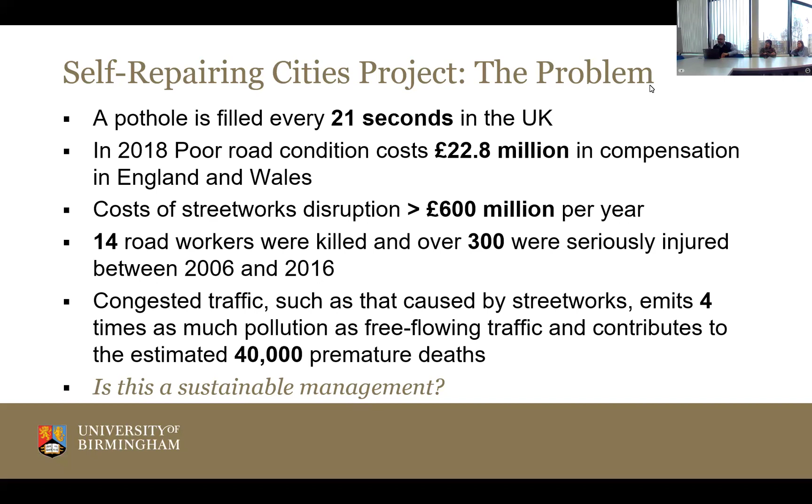As part of our solution, the Self-Repairing Cities project, we were looking into automation using robotics, for detection as well as for repair. It was part of our vision for zero disruption from street works and road works by 2050. You can see the list of partners. The University of Leeds was the PI, Birmingham, the University of Southampton, and UCL in London. Different expertise: a lot of people from computer science and robotics backgrounds, as well as engineers, and also the economic side, the human interactions. It was a large project, around £5 million for 4 years. And I was in the Birmingham team.

This is again an illustration of what we tried to do. On your left, number one, this is our current approach, and it is the same everywhere. Yesterday, Sunday, I went around the city of Zurich, around the old town. I could see the nasty trenches. They were not working, the work was just abandoned for the weekend. But open cuts, a lot of small diggers, and it is a very tourist-attraction sort of area.

Obviously, the city wouldn't like to see these people working in there, close to the public, and the risk that poses to the public, etc. You can have congestion. You can disturb the traffic, and we know that sitting in traffic produces more CO2 emissions and other emissions.

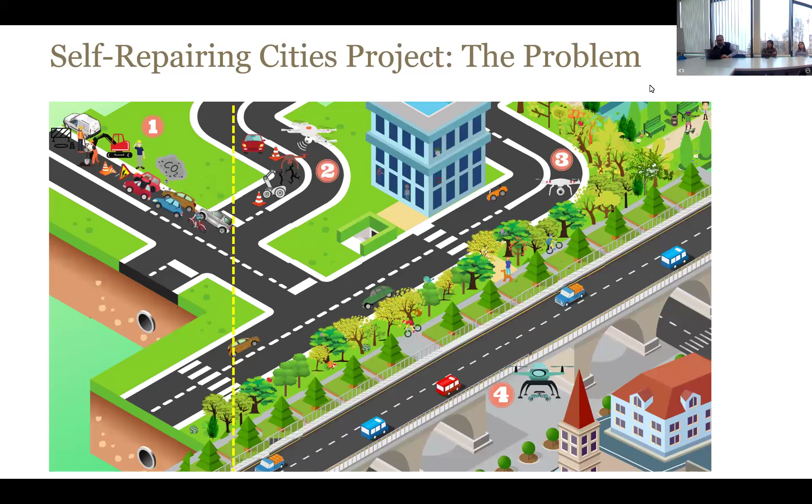What I was involved in was more looking into this proactive approach. So you have a pothole, but what is the mechanism behind it? What happens that ends up in a pothole? This was part of my job, and also working with other teams. UCL in particular, they were material people, so they were into 3D printing.

And then the robotic team, identifying, detecting a crack, to go and measure the volume of the crack with laser scanners and from the images they can take from the drone or robotic platform, and then to do this 3D printing autonomously. So that was a mini project as part of that bigger one, and you can see the steps. Drones were selected to give that flexibility.

So if you go for a proactive approach in 2050, when you don't have human beings, the idea was that you have these hubs in different zones, let's say areas, of the city, and then it can deploy autonomously or with a semi-automated system. They can deploy these drones and they can quickly go during the night.

In the UK, you cannot work, for example, during night time because of the noise to the public. Well, that is the ideal time because traffic is minimum. So if you are doing anything on the road, you are not disturbing the traffic, or it's minimized disturbance. But if we can do it with drones, deploy them, and they can quickly fix a crack, then you can prevent pothole formation. So that was our idea, and therefore using this drone approach.

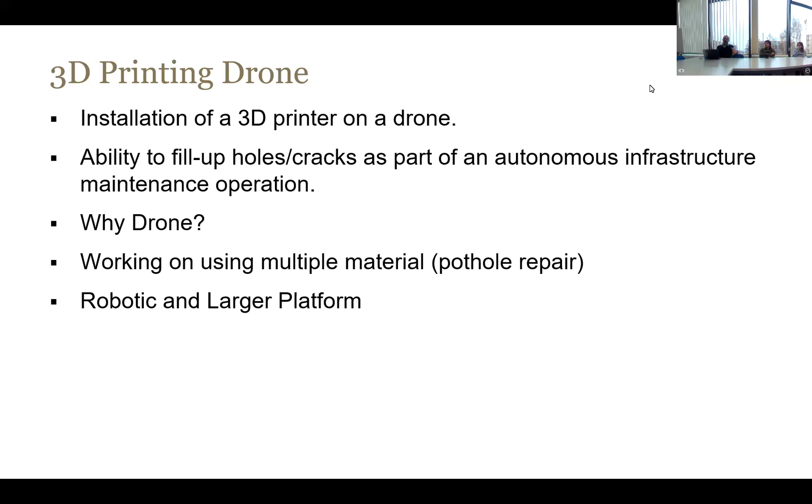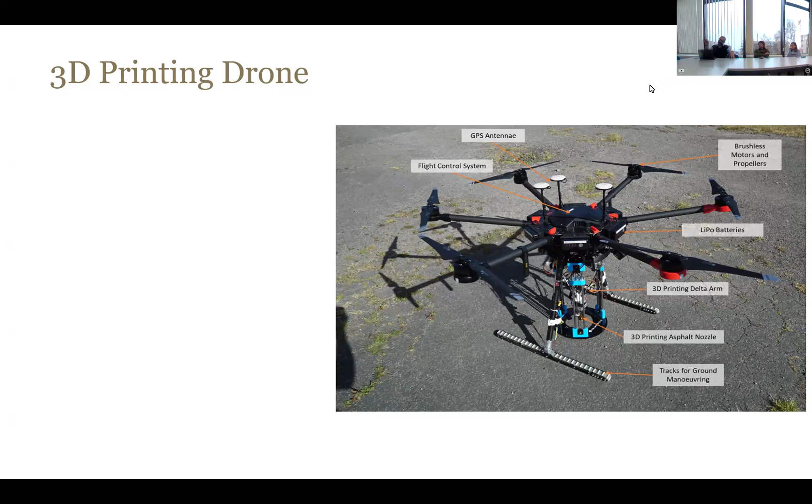And it was equipped with different cameras to detect, so to be used as a survey tool to survey the whole area and identify cracks, etc. And then once on the ground, to start following the crack, if you like, and treat it immediately.

But then for the 3D printing, the higher temperature would make it more workable, so you would ensure that it would go through the cracks. So part of our research was finding the right balance, if you like. So having the right workability, if you like, of the bitumen, while not sacrificing that much on the durability of the material and the 3D printed finish.

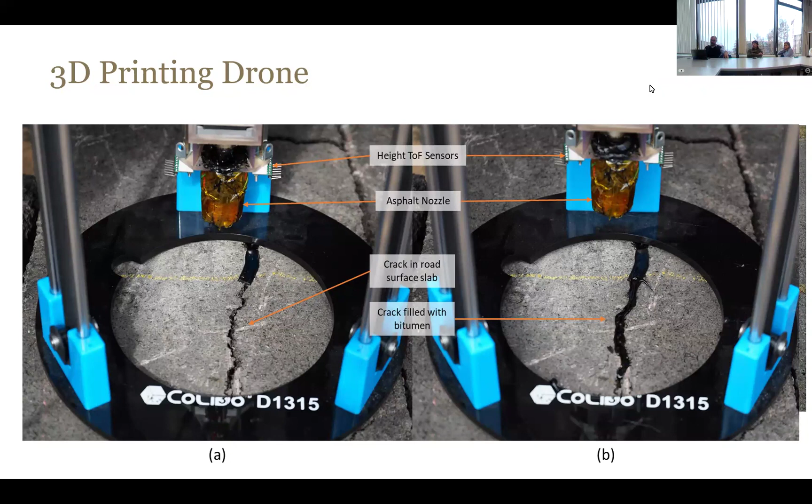I can see a lot of crack sealing around the campus and in Zurich, but it's not the same in the UK. So road authorities, councils, they pretty much abandoned this crack sealing because of the hazard to the road users. So they wouldn't stay. Normally, with the sealing, there would be a hazard to the road users, smashing people's windows, etc. But yeah, it was part of our research.

But roads are built on ground. Within that ground and under the road structure or within the road structure, you've got buried utilities. Normally, the owner of these buried utilities is another organization. It's not a city council. It's water industry, for example, or water companies. There are some assets that there might be, but there might be other assets that they are not. They have different owners, and these owners, they are not necessarily talking to each other.

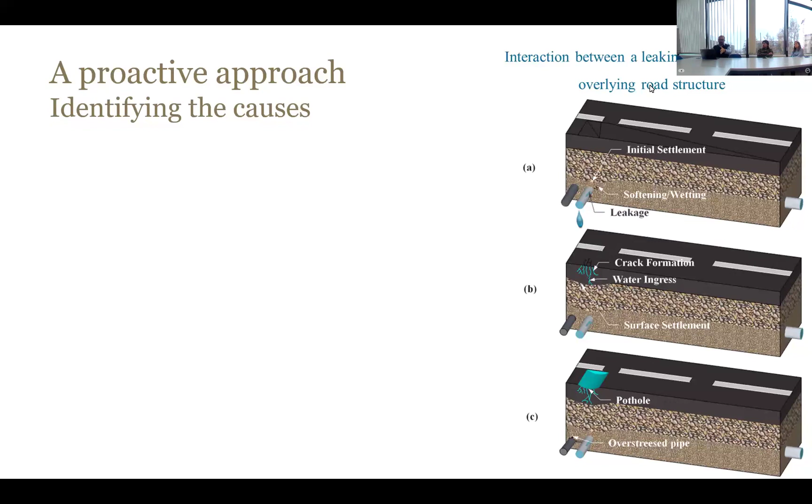We followed the standard UK guidelines. So just the guidelines we followed, but the guidelines would give you a bit of flexibility. All right. So one was with the highest standard, highest end of material, compaction, etc. And the one closer to us, we tried to go with the way that the industry is operating at the moment. So the standard would suggest, just a suggestion, that they compact it every, I think, 100 millimeters, or every layer of material. But industry, they wouldn't have time for that.

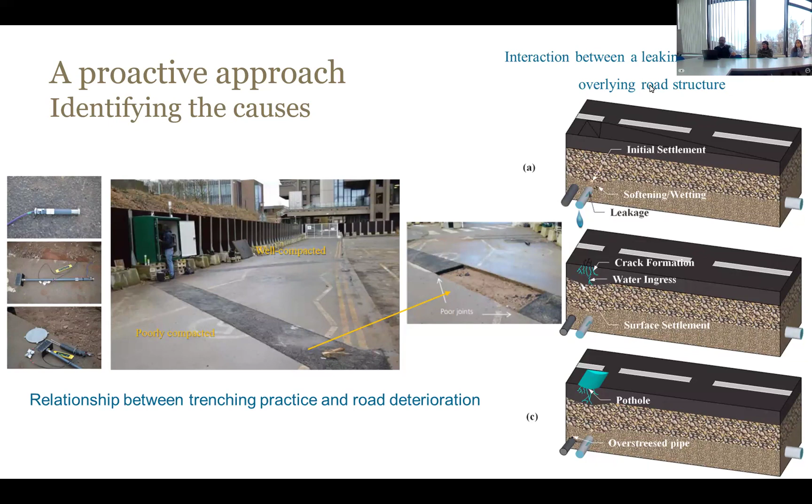So we tried to have this joint in the middle. We left it for the night, and that night there was snowfall in Birmingham. So then water as well as changes in temperature. And we had both trenches instrumented with different instruments. We had a pipe buried inside as well. And this is a year after installation.

So the one on your right bottom, you can see red spots. That's the trench which I just described, the one with a joint in the middle, with minimum compaction and minimum compaction energy. I can recall the displacement of 70 millimeters in one point of that. Just to demonstrate that our trenching activities, our street works, as they are called, have an impact on our road networks. And by not considering this interaction, we are not managing our asset properly or in a sustainable way.

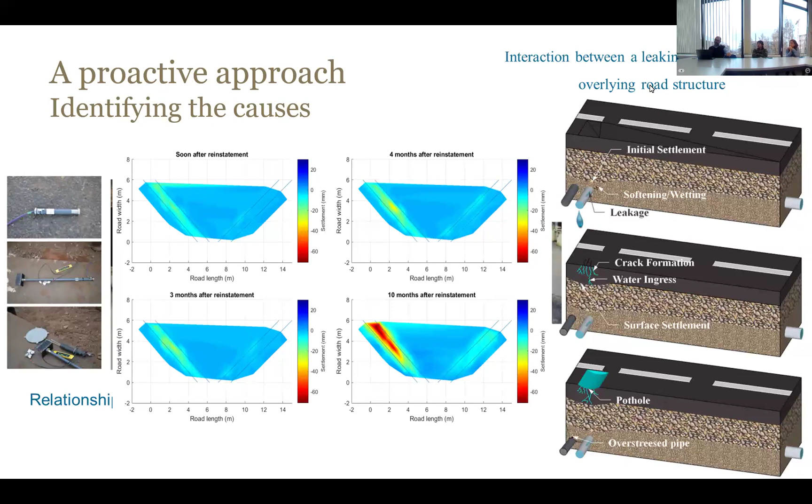So that's it with my previous slide. And this is what I'm doing at the moment. It's a list of my ongoing PhD studies, as well as the ones recently finished. So left-hand side, top, a digitalization of inventory. So the project that I described, self-repairing city, automation, robotics, how to do our inventory. The way we are doing it now, we have a lot of digitalization everywhere, in the UK as well as here and other countries. But this is just collecting data. It's not necessarily the way that we manage this data, we use this data.

So a lot of work by my PhD students around that, managing data, how to use data. Part of it is, as you can see on the bottom of that box, condition prediction. So using this data for prediction models, especially on road application, and using a probabilistic approach, and I'll show you an example later on. So application, road safety, improve road safety, improve the life of the asset. Part of that is to inform decision-making around selecting the best treatment strategies, what to use, when to intervene, how to intervene. If you have that in place, I would say that it is more viable.

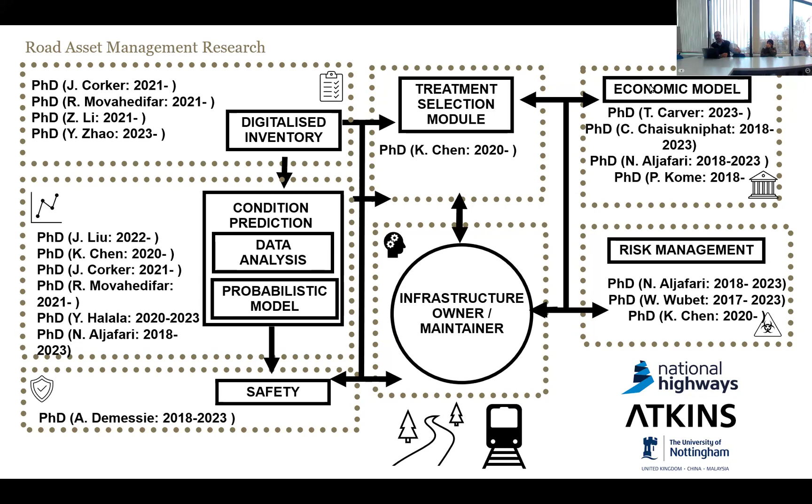Now, so this is informing asset owners. I work closely with asset owners, and I try to have something for them, to inform them, and to tell them how we think we can improve the whole industry. And that will be the impact of the work.

It's just a list of people and organizations that I'm involved in working with at the moment. And some of them from different ends, so from academia, consultants, as well as funders like the World Bank, for example. It's not only UK, it's not only developed countries. I have worked with developing countries, and I'll give you some examples on that end.

This is one of my PhD students. Chen is towards the end of his PhD journey. This is the framework that he developed. It is on digitalization of road network using, on the left you can see, historical data and real-time data. He started with historical data, a database a lot of people have used and are using from the US because it's open to public. It's called LTPP, long-term pavement performance. It's good that it's available.

We started from that database, and it was a numerical model combined with a data-driven, so machine learning, approach to predict, for now, 2 different road defects: something called International Roughness Index, or IRI for short. It's unevenness of the road surface. In the UK, we don't use it. We have longitudinal profile, a different name, pretty much the same thing. It's only unevenness. And rutting is a permanent deformation on the wheel path.

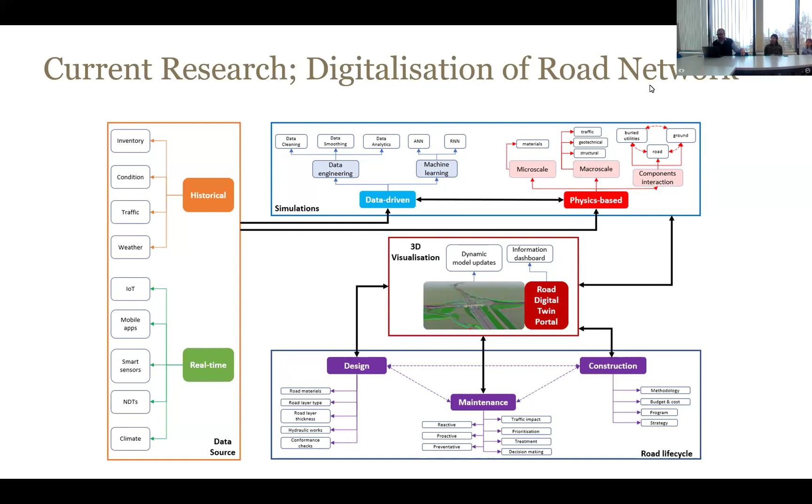On the probability side of things, risk and uncertainty, this is one of the graphs, part of Chen's PhD. So on the top one, you see just a prediction using data-driven models, so machine learning alone. The bottom one is using machine learning and a very basic numerical model of the road pavement. And what we try to do is randomness in selecting the training and validation portion of the data, so the uncertainty just arising from that. And we try to limit the portion given to the model.

So it wouldn't be showing a range of, let's say, 1 to 8, and then asking the machine learning algorithm to predict a value of 11, to make sure that the machine would see all these ranges. But then just the uncertainty, so those different lines, and you can see quite an area in green, it's just showing the uncertainty raised from that selection of training portions. But you can see when we combine that machine learning with the numerical model, we reduce that range, so reduce the uncertainty. It would be just the start, and then ultimately it would capture the uncertainty coming from data collection.

So the US database is quite good, it's probably the best in the world which is shared with the public. But going through that data, you can see a lot of uncertainties, a lot of voids, gaps in the data, as well as a lot of noise. So you can see the road, without any reason, is improving itself. That would be just an error from the machine. And they sometimes collect sub-millimeter accuracy, or claim sub-millimeter changes in variation, while their devices wouldn't be that accurate. So again, a source of uncertainty. But at the moment, we are not capturing that.

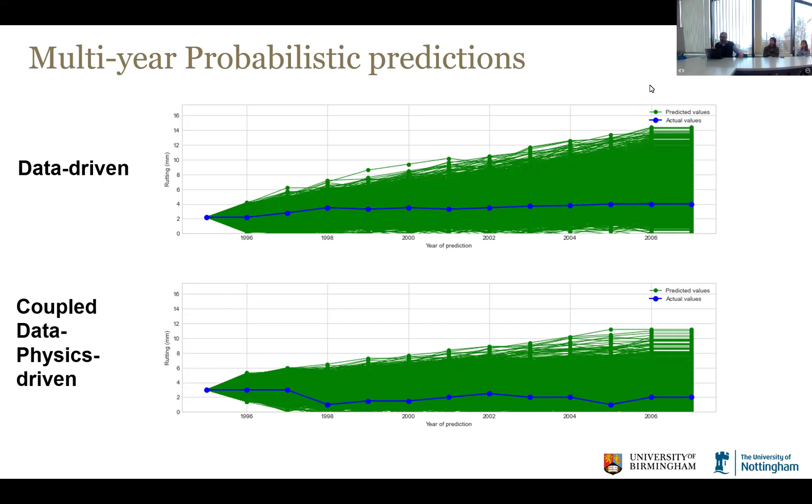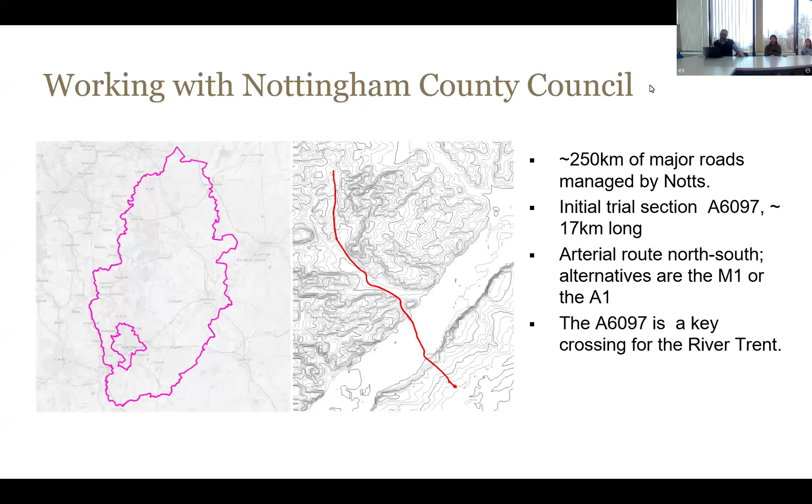That was one example. Another example of that digitalization is Jonathan, and Jonathan's ideas. He has access to a road section, so he has access to a road network, actually. It's the Nottinghamshire road network. And so it is what we call local roads. Local roads are rural roads and urban roads together, so not the strategic roads, not the motorways. So he selected one road section, you can see it here. And then Jonathan is developing this idea of combining different sources of data.

Some of them are accessible to the public: topology. You can see the drainage system to come after that. And this is something that Johnny developed, a GIS-based approach, as well as rainfall events. So these are available for everyone.

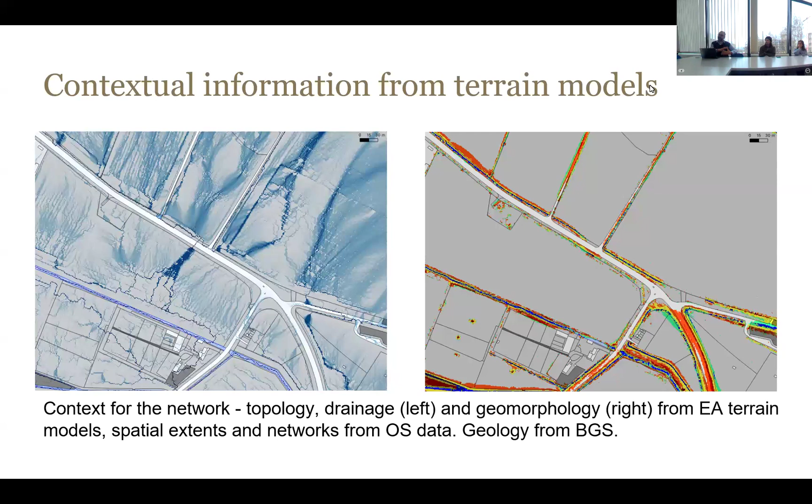Can we use these sources of data combined with road condition to then predict road condition in the near future and in the long-term future? And this is something that Johnny is working toward. And if we can predict, as an application of this data set or this approach, we can predict hotspots, because water would stay on the road surface in this particular location, and that would be a hazard to road users.

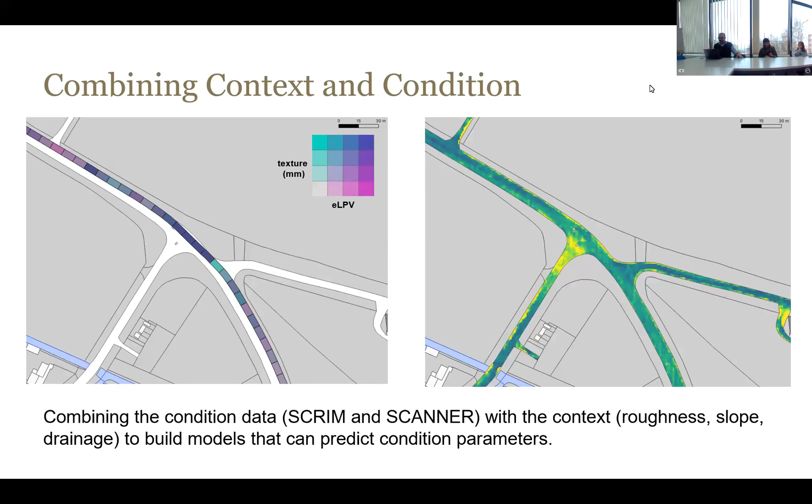Another of my PhD students, and I think probably we're reaching the end of my presentation, a few more slides, but it's not very long. It's Reza. Reza is working with Kuhn at the moment on the lidar data that I said. So this is the Abaqus model that you can see here. Reza's PhD is looking into interaction between buried pipe and road surface.

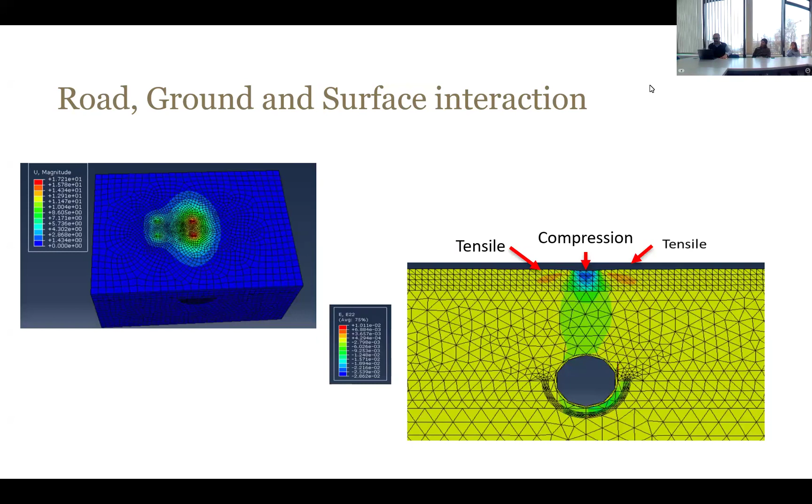So the example I showed you before, if you have a leaking pipe buried under the road surface, can you see any particular defect in the surface? Or the other way, if we know there is a buried pipe, can we say there is a probability of having a leaking pipe there because of the type of defect that you can see in the surface? So he started with the numerical model to see what sort of stress, strain, and distribution of those you can see in the surface.

And then he's validating his model using small-scale tests. So this is the test experiment Reza and Kuhn are working on at the moment. It's a box, a cubic meter box, and there is a pipe buried. So you can see the control section in the middle. A pipe buried under a road structure. We use cold asphalt to just simplify the process. Hot asphalt is fine, but it will be a bit harder to build inside the laboratory.

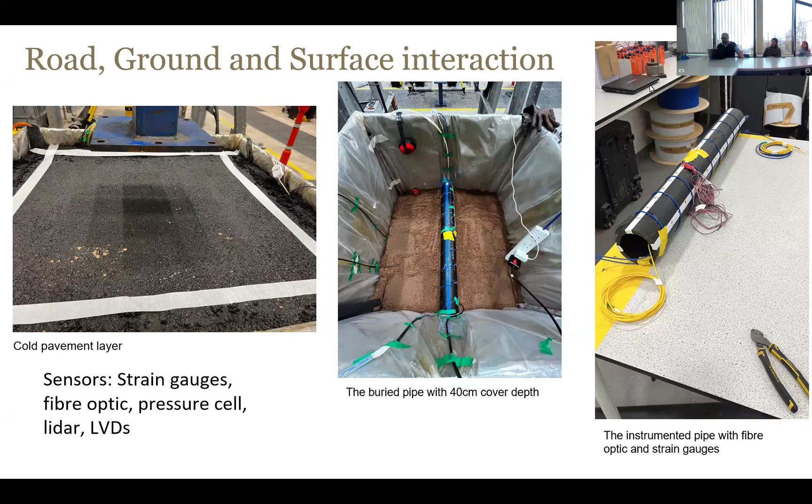And you can see the pipe on the right-hand side, fiber optic around the pipe, some strain gauges attached to the surface, and some other equipment, and you can see the list on the left-hand side, to ensure that Reza would get enough information to validate the numerical model.

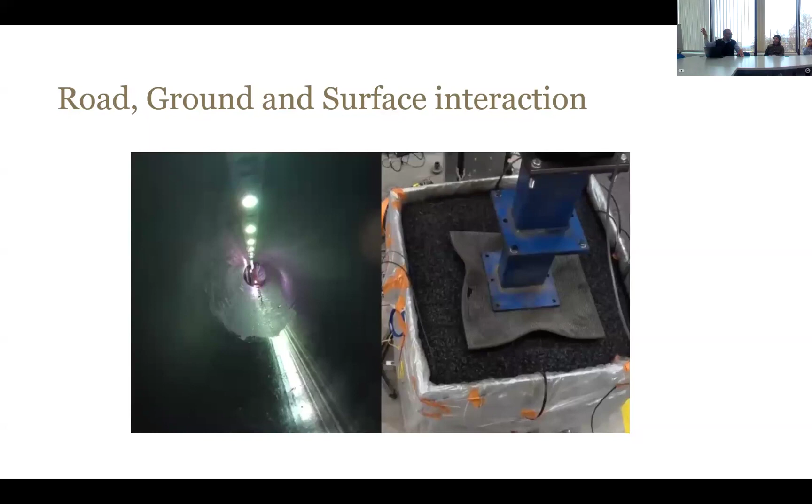And this is just a short video from the inside, showing the cyclic loading on the right-hand side. It's an actuator. We put a pad on the surface to minimize the punching. This is simulating the traffic, that's the cyclic loading, and a GoPro inside the pipe just to capture the deflection inside the pipe, for image processing later on to see the deflection inside the pipe. 1 million cycles of loading so far.

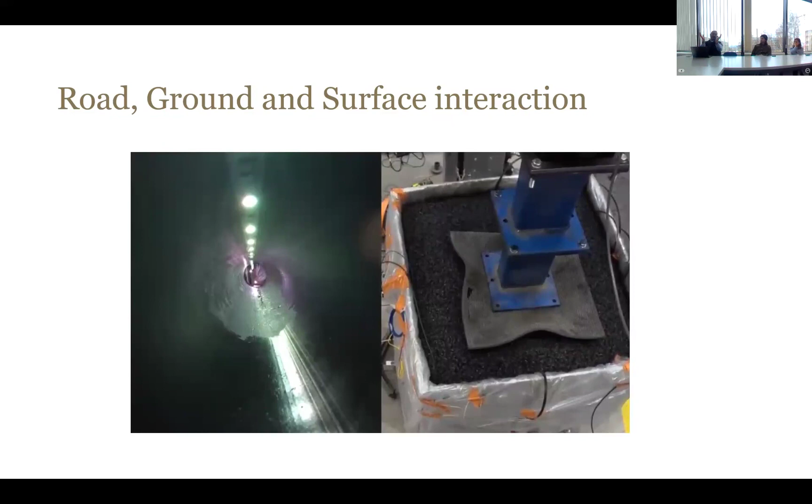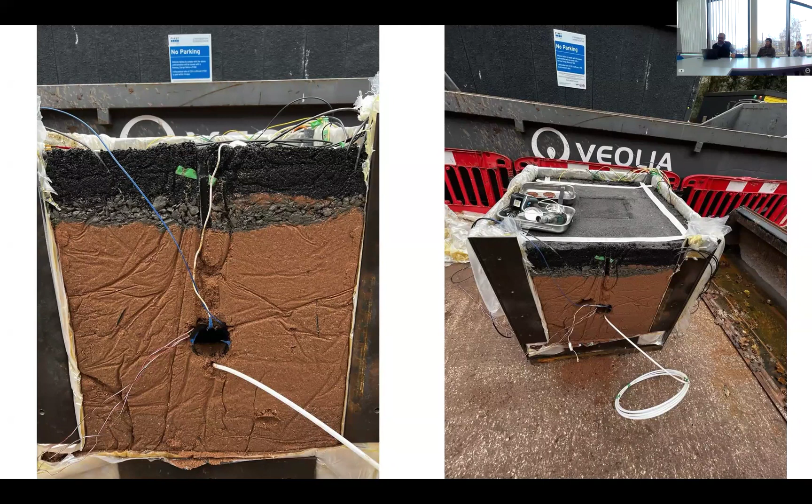And so Reza has finished the control section, and now the next test is having a wet area around the pipe to simulate a leaking pipe. This is after the test, so a side of the box can be removed, and we removed it, and you can see the sort of permanent deformation on the surface. So if you have a leaking pipe, you will have that permanent deformation underneath, and then some sort of rutting, and you can see it from the side of the box.

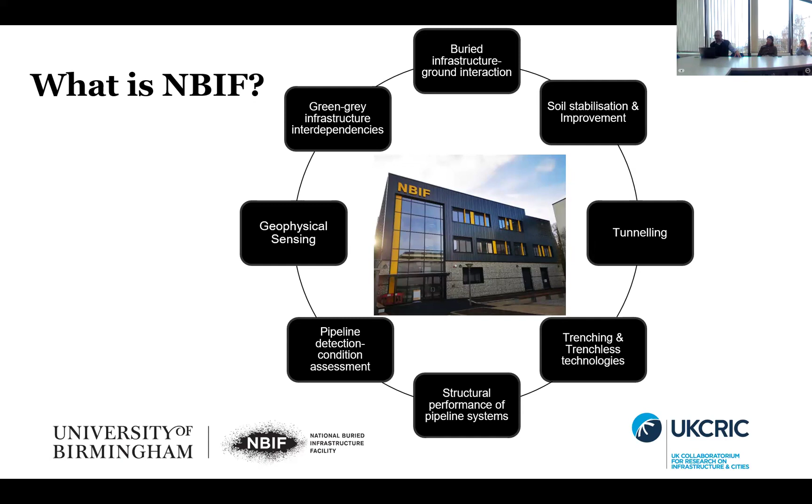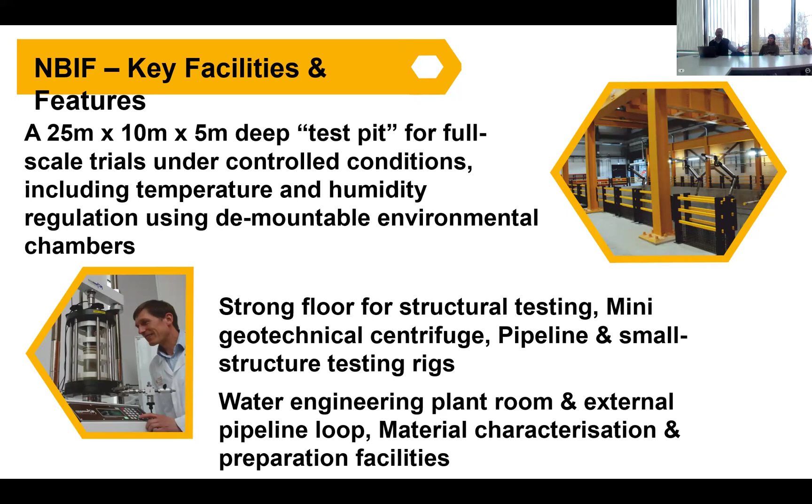The test is conducted in this facility, so I have 3 slides to just introduce the facility that we have. The facility is called National Buried Infrastructure. This facility is relatively new, funded by the government, and it is 25 meters by 10 meters by 5 meters. So it's a large pit, and you can see here that you can have different bays, you can have large-scale tests. We are just using a strong floor to do the small test.

The initial plan was to have at least one large size demonstration. What we will see. As you may know, if you are doing an experiment, a lot of things can go wrong in experiments. So time is always a big challenge in experimental work.

And so Reza is reaching pretty much the end of his active time as a researcher. He even has time for writing up. He wouldn't be able to do experiments, but there are plans to extend the project beyond his PhD.

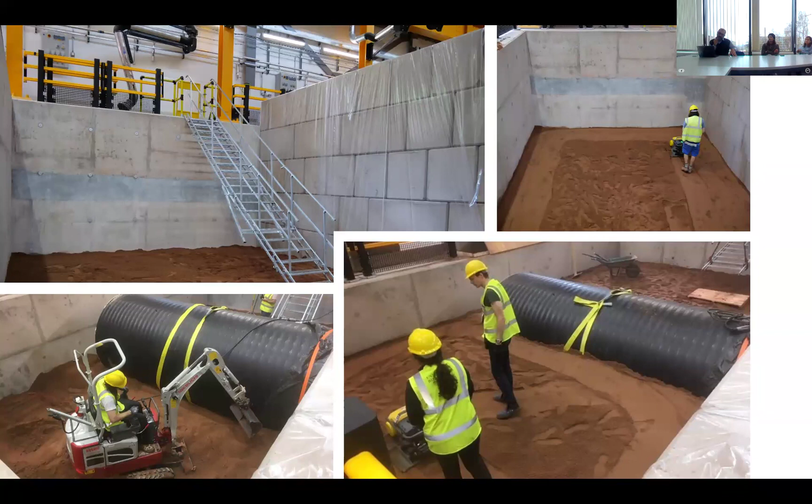And this is inside the pits, and you can see a relatively large pipe buried. We do different tests. For example, you can see from here the central bay has a moving floor. So there are 52 actuators, and they can move independently. So you can simulate a moving floor, or we can simulate the tunneling impact, for example. And there are projects at the moment going around that.

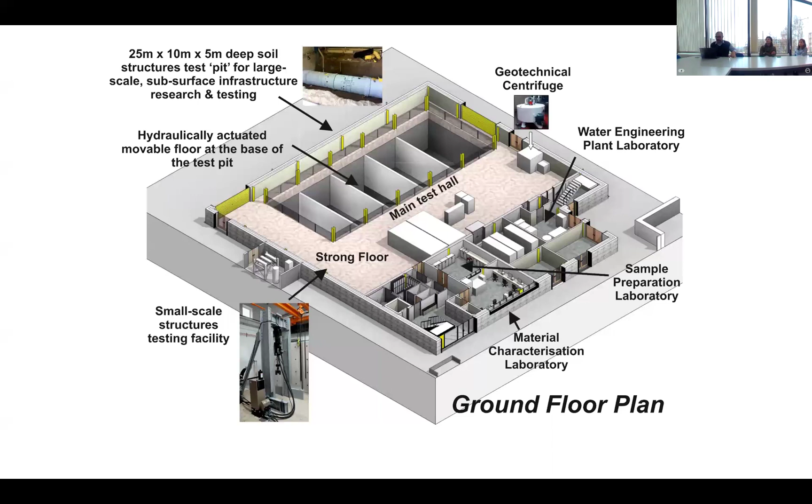Couple of slides, and that's it. Another thing that I'm working on is using this data. This is a project funded by UK National Highways, and we got Atkins Realis, a consultant, as a partner of the project. Tom is working on that research project, and the idea is we have access to these different sources of data. Can we use this data to predict road user behavior?

National Highways is interested because they want to see if they can use that information to inform decision making. At the moment, they have these net zero ambitions. They want to reduce significantly, to zero, the road network impact on the environment, CO2 emission and other sorts of impacts. If they have roads with minimum emission, as a road user, if I still have my V8 engine with fossil fuel going on that network, they cannot claim this net zero.

So somehow they need to have an impact on the road user. They need to talk to the road users. And therefore they are interested to see what the models are for when we make a decision, which road section to use, if you like, how to go from A to B. It's not always using the road network, but sometimes in the middle of our journey, we might end up even using public transport. We might end up on their assets or a strategic road, etc.

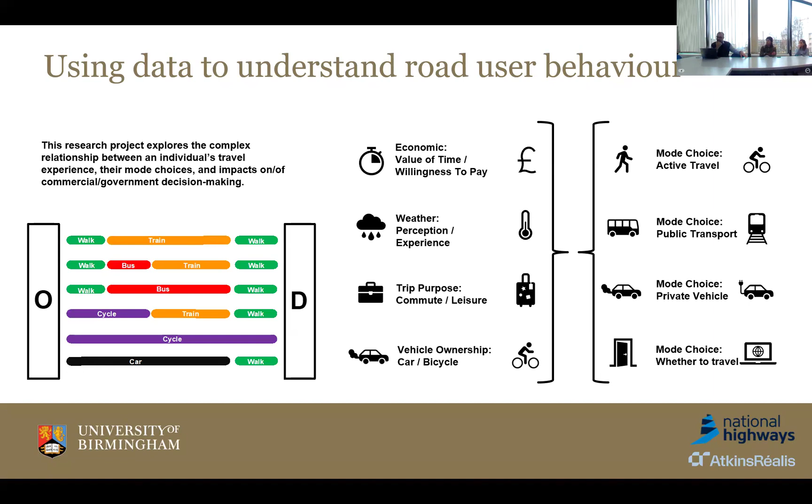On the socioeconomic side of things, I recently finished a project for an organization called PIARC. PIARC is a global road organization. They were established in 1909. Over 100 countries are part of PIARC, and they were interested in social equity and social accessibility.

So whatever we discussed about road networks, having a durable road network, what about us? What about the human being? What about our access and social accessibility through this network? Where are we as part of this equation? Where is this social equity? It was quite interesting. We did this project for them, and I'm not going through the details, but I was looking into what they called global north and global south, so developed countries and developing countries.

It was quite interesting. This concept of social equity, social accessibility, is quite different across these two spectrums. For part of the world, accessibility is just having access, having a road from a village to a hospital. That's what they are looking for. While in the other part of the world, accessibility and equity have different meanings. Now they are talking about value of time. The minimum access, if you like, is there, but it is different aspects. Just to show how accessibility and equity can be used.